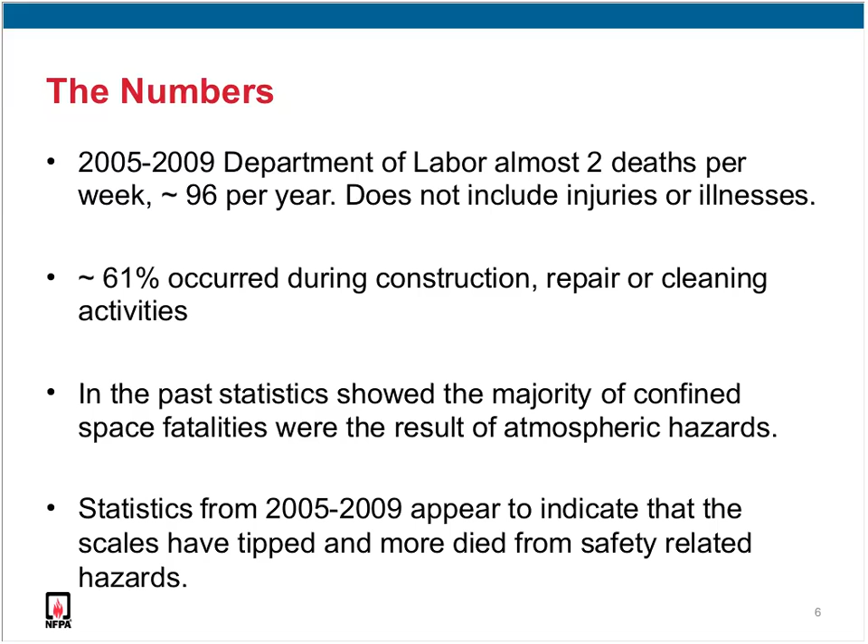One example of this is in 2010, 26 workers were killed in grain engulfments. According to researchers at Purdue University, there have been more than 900 cases of grain engulfment reported, with a fatality rate of 62% over the past 50 years. So this has been a hazard that has been well recognized for 50 years, and yet it continues to occur.

Confined space fatalities in the same types of spaces in the same industries occur over and over again. Some examples of the most common are things like agriculture, brewery, and wine tanks. Those are sort of predictable confined spaces.

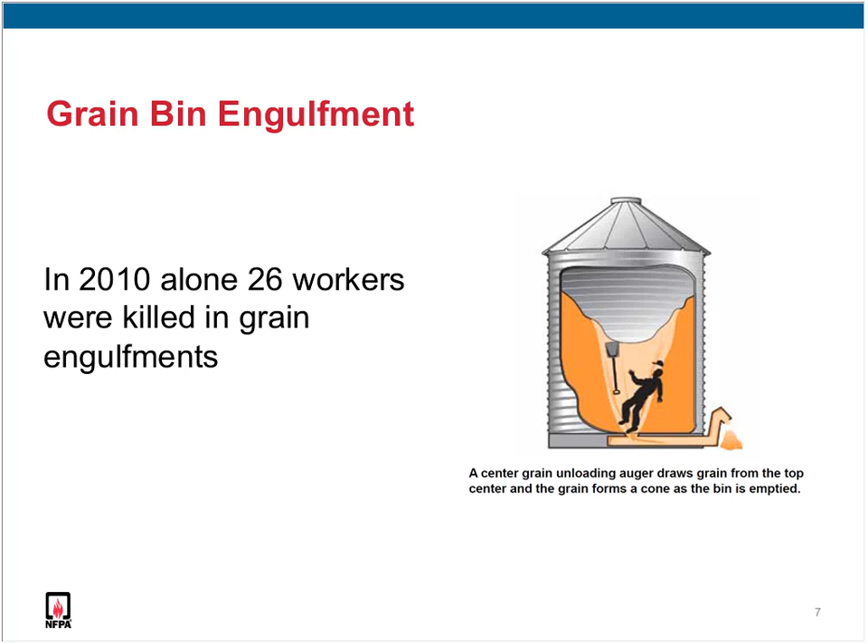So many may wonder how NFPA got into this confined space arena. NFPA has a long history of established standards related to confined space entry. One of the most widely recognized is NFPA 306, which since 1922 has been the Standard for Control of Gas Hazards on Vessels, and that is the origin of the Marine Chemist Program.

For those not familiar with what a marine chemist is, I think of it almost like a CIH who specializes in the maritime industry, particularly in confined space entry and hot work in that industry. Those are the folks who certify tanks, ships, and barges as safe for entry or hot work, and they have a very rigorous training program with testing for competency.

NFPA has been addressing that since 1922 and has had a lot of success in the maritime industry with preventing fatalities. We also have several other documents, like NFPA 326, which is safeguarding of tanks and containers for entry, cleaning, or repair. We also get into confined space rescue with standards such as NFPA 1670, operations and training for technical search and rescue incidents, and NFPA 1006, the rescue technician professional qualifications. So we've got many years of experience in confined space entry and in things like hot work and rescue.

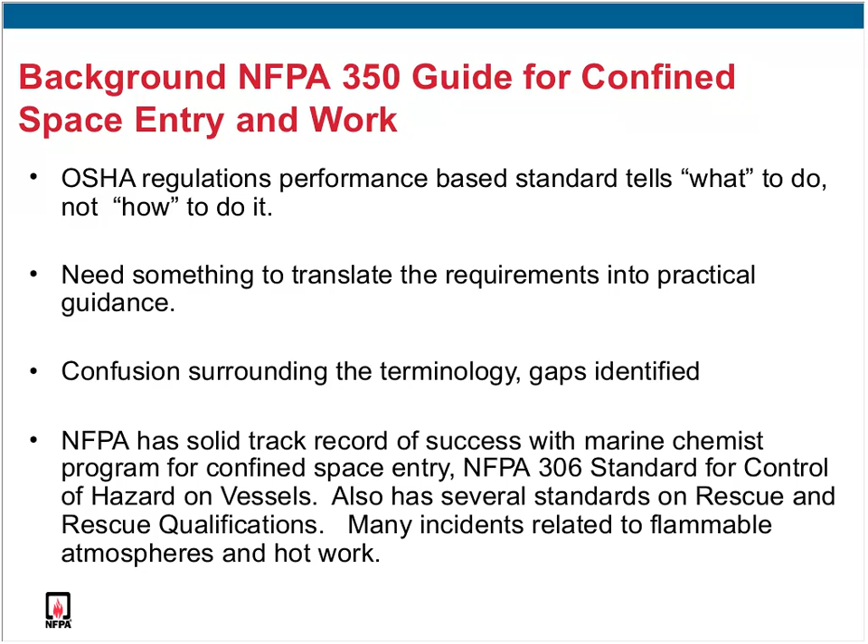Looking at the success of the Marine Chemist Program at preventing injuries and deaths, the Standards Council at NFPA approved the formation of a new committee with a new project to be developed on confined space entry.

We had our first meeting of the committee in September of 2012. NFPA committees are comprised of up to 30 individuals from a variety of interest groups such as manufacturers, special experts, enforcers, labor representatives, document users, and insurers. This group came together for the first time in Philadelphia to work on the preliminary draft of the document.

Some of you may have heard me talk about this before, but I get kind of sappy when I talk about confined space entry. It's a topic I'm very passionate about, so we met in Philadelphia because I said that's the birthplace of all important documents, and hopefully this will be one of those that has a real positive impact on worker safety and confined space entry.

So we met, and then we had two additional meetings after that September meeting, and we developed a draft document. That draft document was approved by the Standards Council, and it went out for public input, so at that point it was out there for the public to review and make comments on.

We did receive quite a few comments on that. We went back and looked at all of those, and the committee has to actually look at each individual comment that was received, and they make a change to the document if they feel there was something valid that was brought up, a concern.

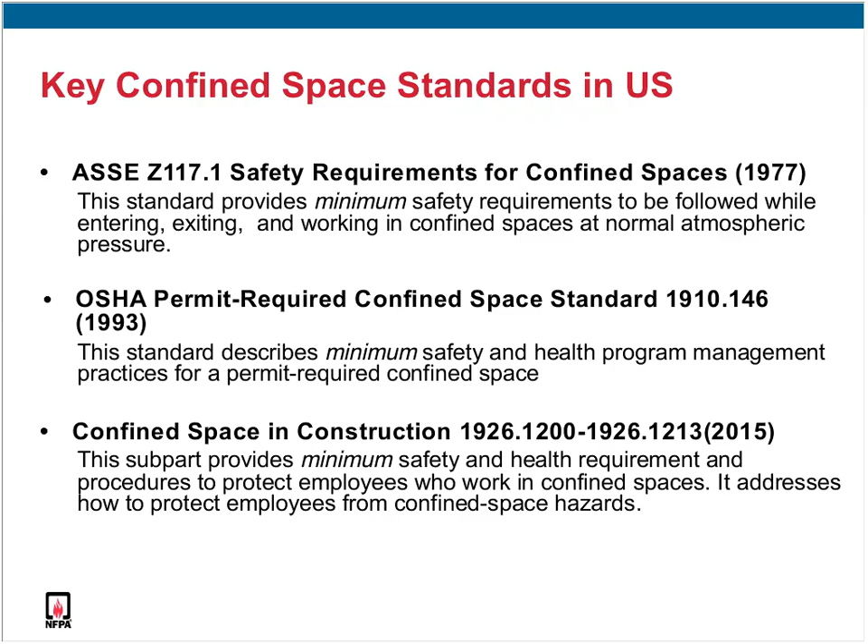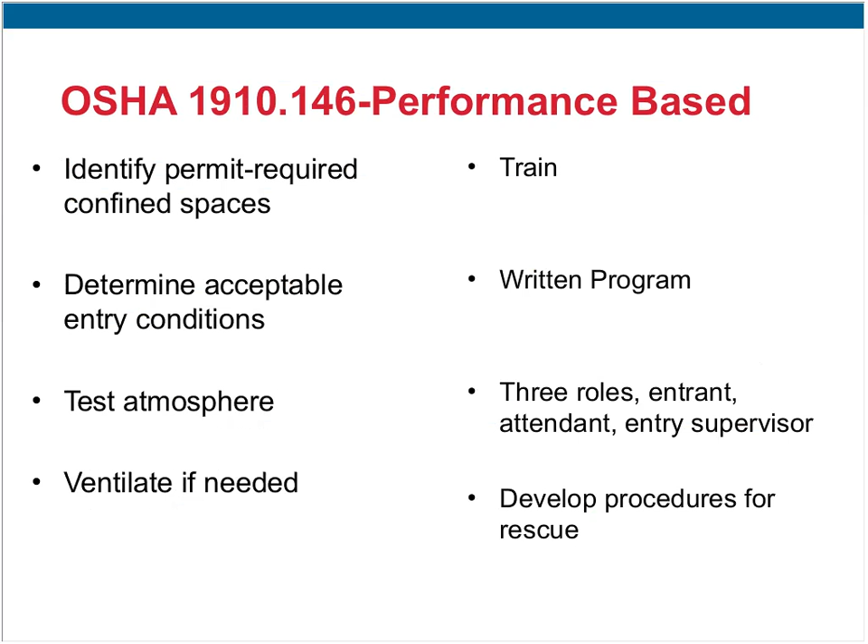As a basis for what the committee was looking at, we started off with the OSHA 1910.146 standard, which again is a performance-based standard. These are some of the items covered by the permit-required confined space standard, but again, it tells you what you need to do. For example, train your employees, develop written programs, identify your spaces, test your atmosphere, ventilate, etc., but it does not tell you how to do it.

So what are some of the problems we see with performance-based standards? Well, performance-based standards focus on a desired outcome. It tells you what to do and not how to do it. And while ultimately what we all want is just a safe confined space entry, it's sometimes difficult to know how to get there. I like to use this example of a performance standard that some of you out there who have had children will really appreciate.

If my goal was to have my kids clean up their room, and I simply told them to clean up their rooms, my son would probably pick up his toys and clothes and never vacuum or dust, whereas my daughter would likely vacuum and dust and leave her clothes and toys all over the floor. And neither one of them would probably make their beds. So while each of them may think they have done what was asked, the desired outcome of what I personally consider a clean room would not be achieved in either case.

What I probably would need to do is to tell them how to clean up their rooms by providing a more prescriptive requirement, saying that I wanted them to pick up their clothes, their toys, dust, vacuum, and make their beds in order to achieve the goal that I wanted. So there seems to be a little bit of a balance between allowing some freedom for interpreting what needs to be done and providing guidance on how to achieve the desired outcome.

So what is NFPA 350? Well, first of all, it's a guide. It is not a standard. It uses the words should versus shall. And the goal is to provide information to protect workers who enter confined spaces in all industries. So the goal that the committee had with this was that it would apply to all confined spaces regardless of industry. That means we would want this to apply to construction as well as general industry, as well as any other type of confined space entry that would occur.

So it's designed to supplement existing regulations, standards, and work practices by providing additional guidance. The goal is really to achieve a higher level of safety with best practices for identifying, evaluating, eliminating, controlling, or mitigating hazards. NFPA 350 also provides cross-references to related confined space documents where appropriate throughout the document. For example, a number of other ASSE and API, American Petroleum Institute standards are referenced throughout the document where appropriate.

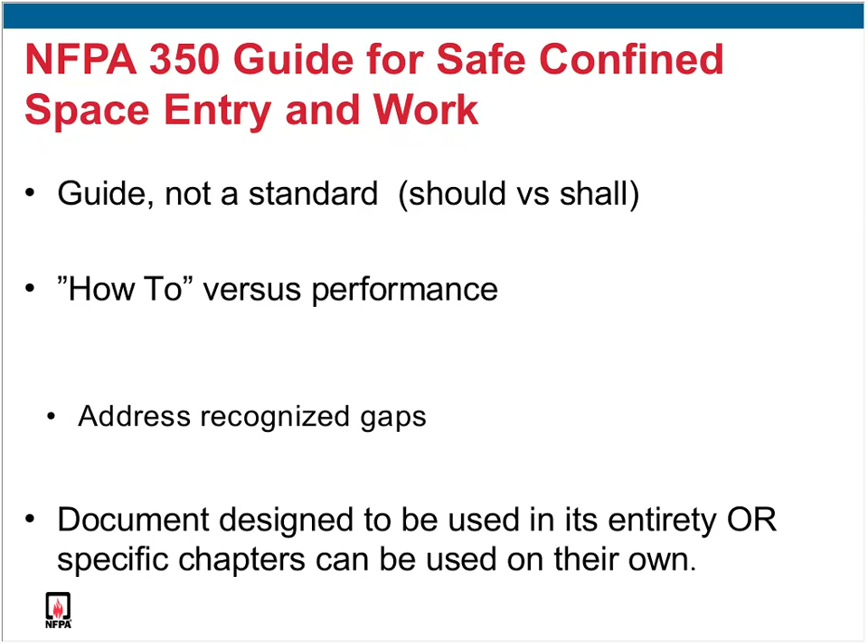So when the committee first met in September of 2012, they discussed the basic premise of the document they were about to develop. Some of the ground rules established early on included that whatever the committee came up with, they did not want to conflict with OSHA. That, of course, made sense. They wanted to be at least as strict as OSHA's permit-required confined space standard and in no way conflict with it, because this document is designed to supplement that information, not to replace the existing standard. The committee also wanted to eliminate confusion surrounding the terminology used in the confined space standards, address gaps, and provide guidance beyond the minimums.

So this is just a brief summary of the scope of the document that reiterates some of these goals that they had.

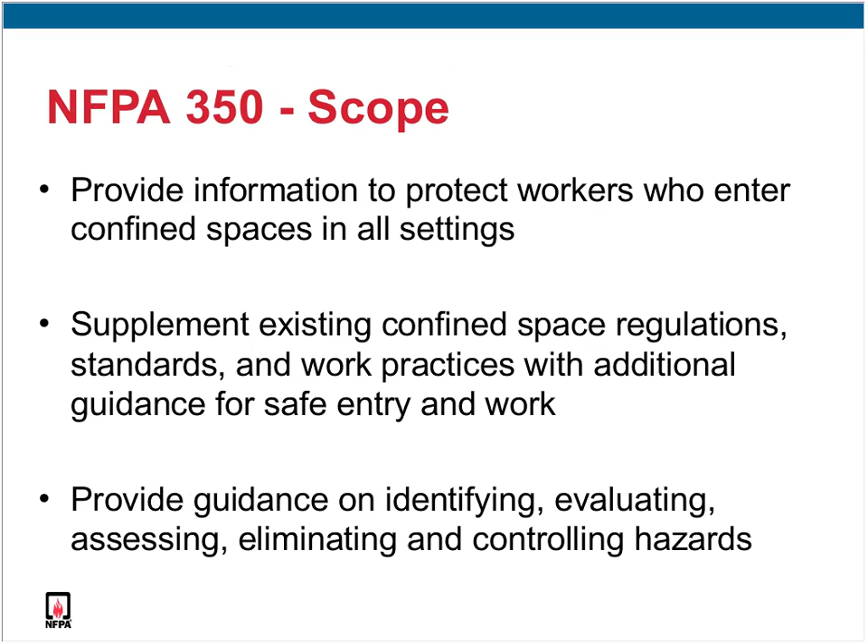First of all, the committee was very concerned, and this took a significant amount of time, with trying to address issues they saw as causing confusion. When the committee met for the first time, they had the benefit of a 20-year history on what worked and did not work with OSHA's permit-required confined space standard. The first thing they did was brainstorm to identify issues they felt should be addressed in the new guide.

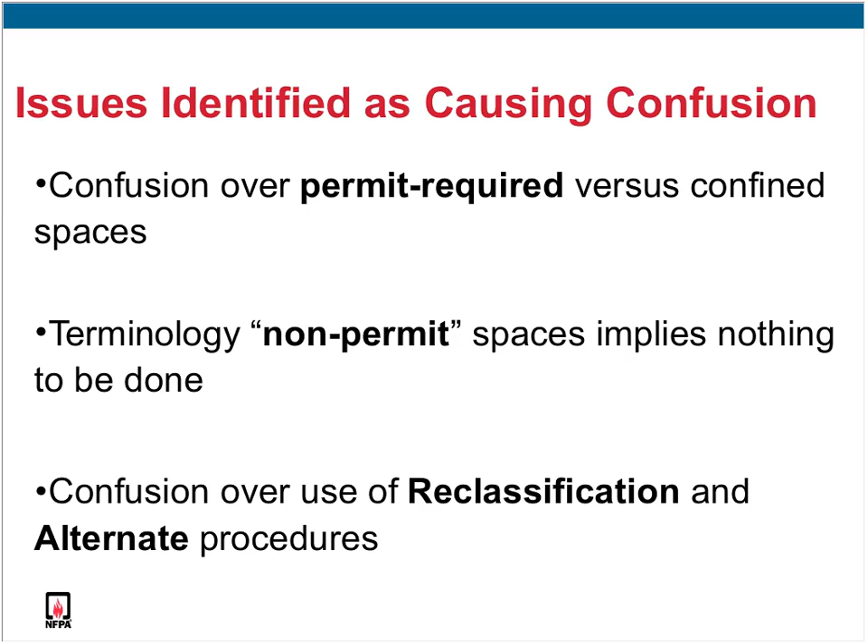The first issue they addressed was the confusion created by the terms confined space versus permit-required confined space. In addition, they looked at the confusion caused by different types of entries, reclassification versus alternate procedures, and how those could be different from permit-required confined space entries. They then looked at gaps that existed, primarily in the lack of consideration of things like adjacent hazards and how hazards were identified and controlled. They also looked at things like competencies and how that was handled, looking back at things like the Marine Chemist program, where competencies for things like gas monitoring provided some guidance.

So here is one of the biggest issues I think most would agree is confusing about OSHA's permit-required confined space standard. A space that's called a confined space one day becomes a permit-required confined space the next, as soon as you bring a chemical in or go to weld in a space. In addition, a space that could be entered using reclassification one day needs to all of a sudden be entered using alternate procedures the next day when an atmospheric hazard is introduced.

I don't know about you, but for me, when this standard first came out 20-plus years ago, that was really the thing I had the hardest time wrapping my head around, with some of the terminology. And then to make it even more difficult, trying to explain that difference in terminology to the regulated community and to those who needed to enter confined spaces was always a challenge.

So here's an example of that. As you know, a confined space is only a permit-required confined space when it has a hazard. In 1910.146, OSHA's standard only addresses permit-required confined spaces, so only those spaces that have a hazard. While that may sound reasonable, here's the problem. If you look at something like this water pump vault, is it a confined space not covered by OSHA's standard, or is it a permit-required confined space that is covered by OSHA's standard? The answer is, it depends. A space can be a confined space one time and a permit-required confined space the next. The same space is defined by different terms depending on what's being done in the space.

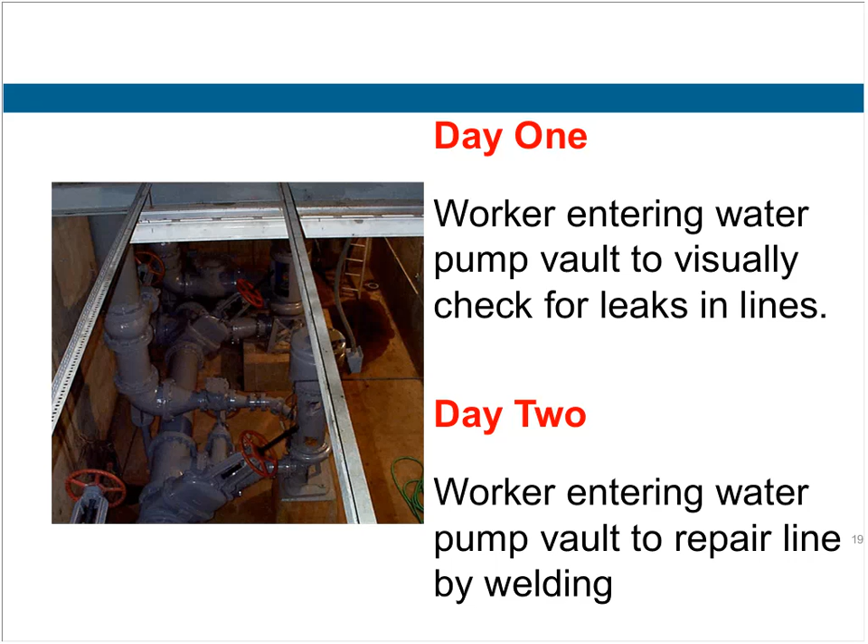So after many hours of deliberation, and I think we have our committee chair also listening in on this, and he's probably shaking his head right now. It was many hours of deliberation. The committee thought that they had come up with a method to solve the problem of confusion, and I think they've done a great job with this.

The problem is we've got to try to all now wrap our heads around this change in how we think about confined spaces. But I think this has really simplified the application of confined space standards.

So the committee decided to only use the term confined space in 350. And the rationale was that all confined spaces have the potential to become permit-required confined spaces depending on what is being done in the space. Therefore, it's important that all confined spaces be evaluated for hazards each time an employee enters one. Then, if a hazard is identified, control measures are determined and permits are issued if necessary.

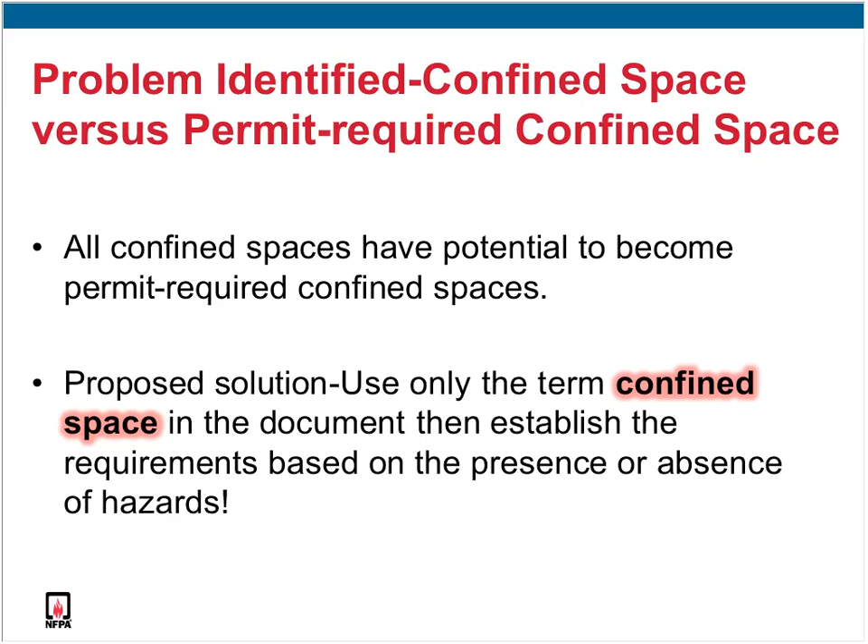So here's the difference: it's a confined space with a permit, not a permit-required confined space. And we'll see how this is applied in 350 in a few minutes.

So to further complicate the issue, if a space is identified as a permit-required confined space, then OSHA allows for 3 different types of entry depending on the type of hazards that remain after control measures are applied. Alternate procedures entry allows a worker to enter a space without an attendant when the only hazard is an atmospheric hazard that can be controlled by ventilation and where periodic monitoring of the space occurs. So there's our alternate procedures.

Reclassification also allows a worker to enter a space without an attendant when all safety and health hazards have been totally eliminated. However, if any atmospheric or serious safety hazards remain in the space, then a full permit is required.

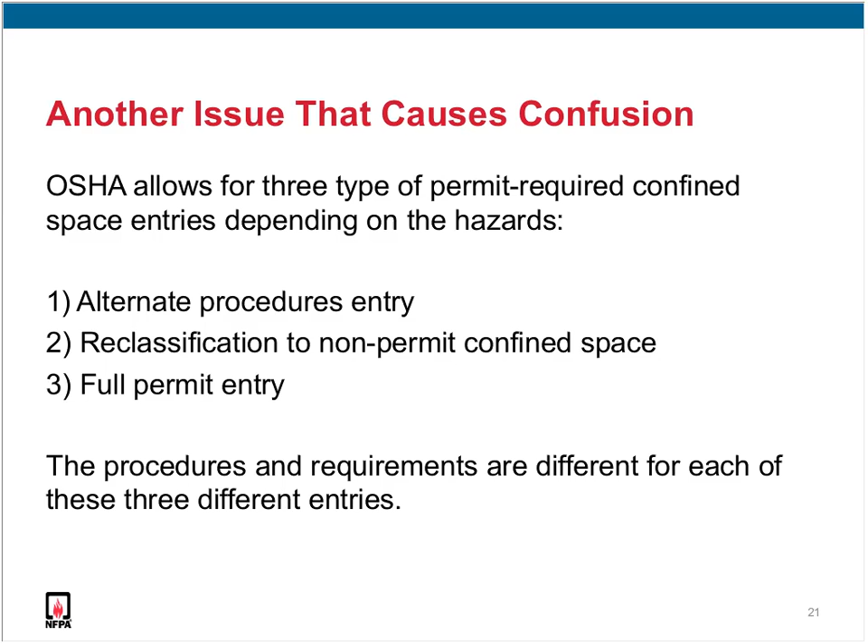And this next slide shows a chart of the 3 types of entries that are allowed under OSHA's permit-required confined space standard. All 3 types of entries require, if you notice in the right-hand column, some type of certification and signature. Many facilities actually use 3 different documents: an alternate procedures entry form, a reclassification entry form, and then a 3rd document for a permit.

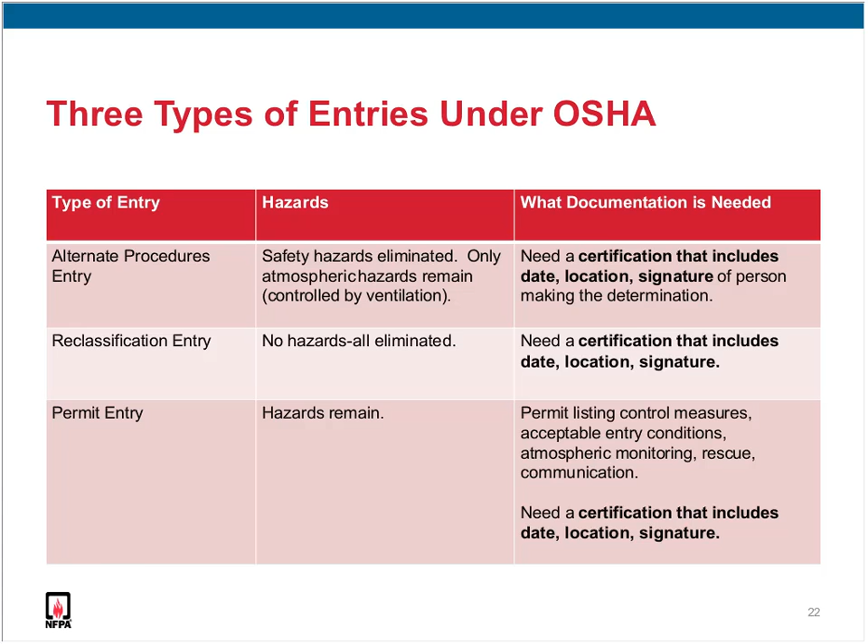But in all cases, in order to determine which of the 3 entries is needed, you first have to determine if there are hazards, and then you need to determine if the hazards are controlled. So in the case of alternate procedures and reclassification, OSHA actually allows you to do this without going through any type of formal checklist. All you need is a certification with a signature saying that determination has been made.

But since all 3 types of entries require an evaluation of a hazard, NFPA 350 recommends using a pre-entry evaluation for all of these confined space entries. So all spaces are evaluated using one form called the pre-entry evaluation form.

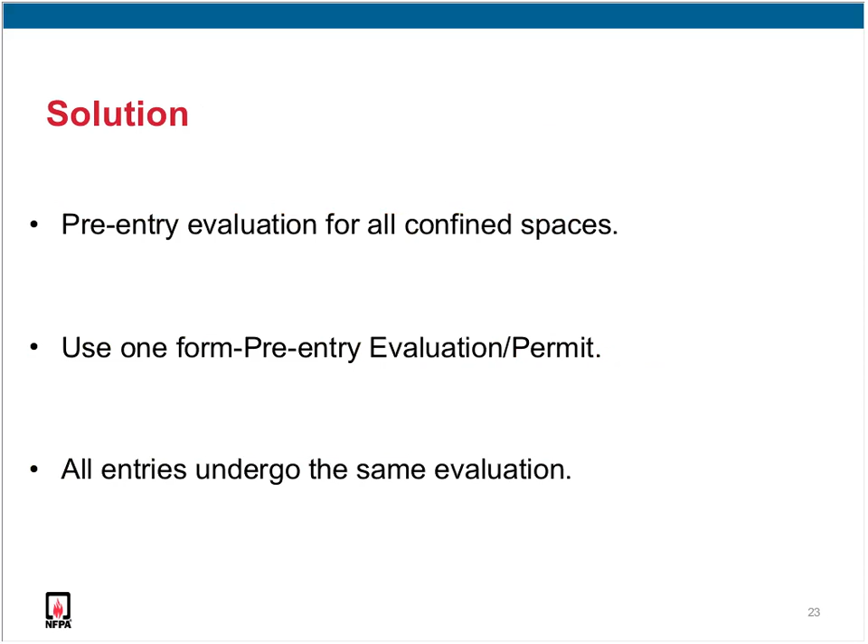So what is a pre-entry evaluation form? Well, it's simply a checklist that helps you walk through the possible inherent, introduced, and adjacent hazards in or adjacent to a confined space, so that you can determine what is needed to enter the space.

The requirement to evaluate these hazards already exists in 1910.146. It's just not always formally documented. So again, for alternate procedures and reclassification, you kind of have to do this all, but you could do it in your head versus going through a formal checklist.

What we found out was that there were many facilities with confined space entry programs who figured out that it just makes sense to use a similar checklist to document the hazards of all confined spaces and to help determine if alternate procedures or reclassification procedures can be used, or whether a permit is needed.

Now, there is one additional thing that NFPA 350 has established for this pre-entry evaluation that you will not see in OSHA's permit-required confined space standard, and that is the recommendation that an additional step be that atmospheric testing be done prior to entry into all confined spaces to verify that a space is safe to enter. And I'll show you how all that works in a minute.

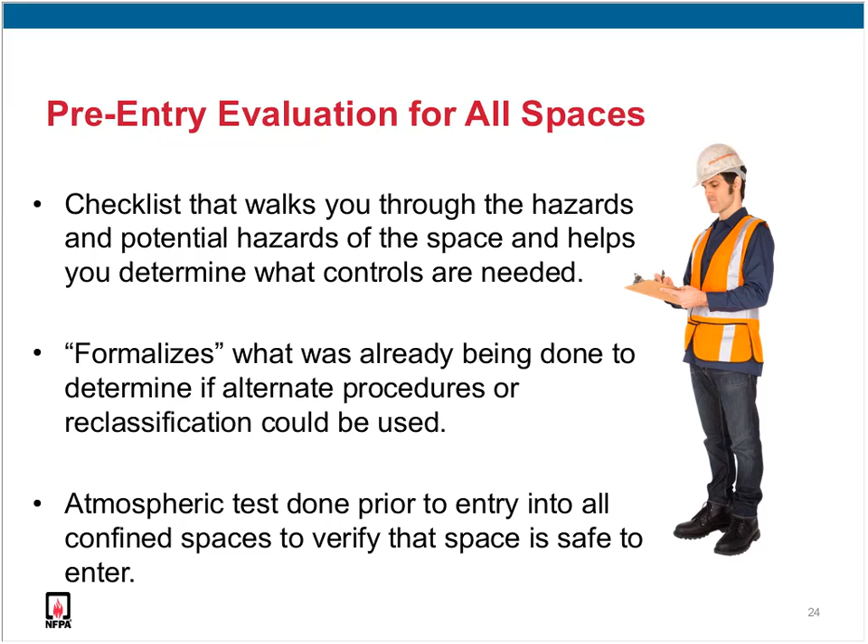So a key component of your pre-entry evaluation is going through to determine your hazards and your controls, and whether there are hazards that still exist in order to determine what types of procedures you need to enter.

We also recommend that you do atmospheric testing, and that's the default position, that you do an atmospheric test. That was a big source of discussion and debate amongst the committee members, but ultimately the committee agreed that...

So spaces that look pretty harmless, you really don't know until you test to verify. And I'm wondering, in that case with the transformer, that may have been something very similar where the atmosphere may have been the cause there, and perhaps that is not something that is normally done.

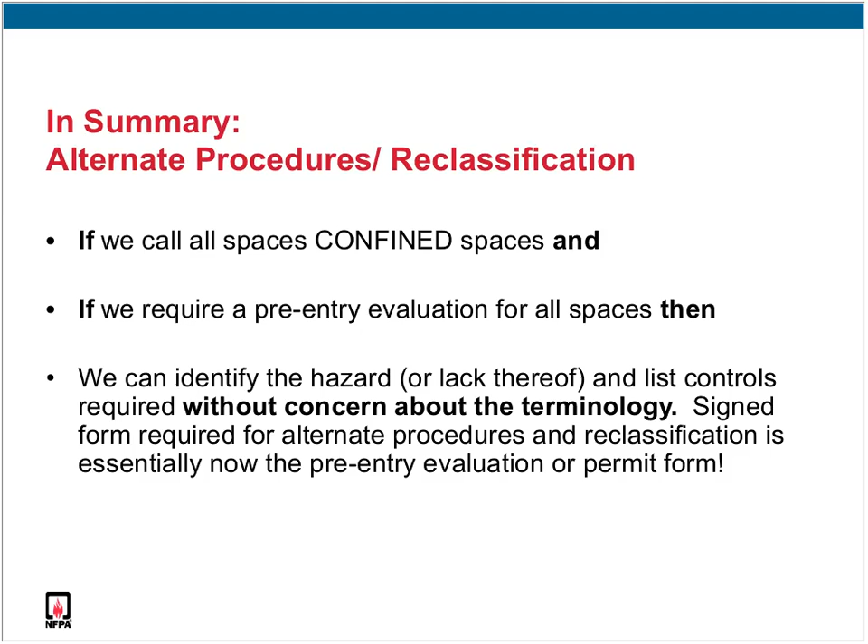This is maybe a little bit small and hard to read, but I'll try to walk you through it. We go through the normal questions we would normally have, where we determine that it's a confined space in these first three questions. Then, if it is a confined space at all and your question is answered yes, you have to go to a pre-entry evaluation under NFPA 350.

From that pre-entry evaluation, you're going to look first at a lot of the safety hazards to make a determination of whether or not those exist. Then, following over to the left-hand side, you would then perform atmospheric monitoring even if there are no safety hazards. So if your answer is no, you still go into performing atmospheric monitoring.

Then you look to see whether or not the levels are outside of established parameters. If they are not, then you end up with a reclassification - way over on the left. So now you have a reclassification space. We don't use that term in NFPA 350, but this kind of walks you through where you would be in the equivalent for the OSHA permit-required confined space standard. So you go through, do your pre-entry evaluation, find that there are no hazards whatsoever, verify that there is no hazardous atmosphere, and you end up with a reclassification space.

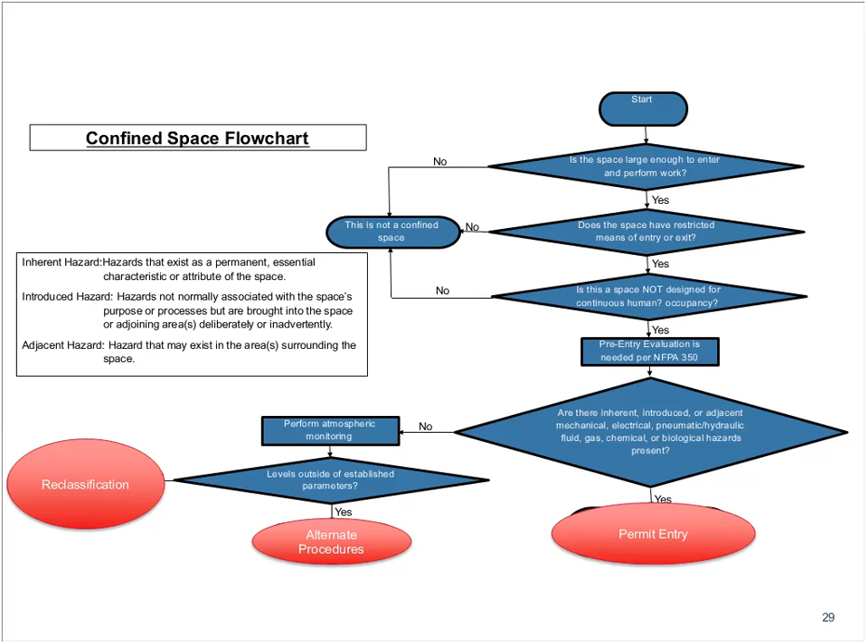So that hopefully clears up some of the confusion. I will tell you that it'll probably take you a little while to keep reading that to understand how that works, because for those of us who have worked in that other terminology for many years, it does start to get a little confusing. Hopefully once you read this a few times, you'll see that it really has simplified things, that we're just calling everything a confined space.

So what about additional things that are covered by 350? Well, there were additional gaps. One of them had to do with atmospheric monitoring. NFPA 350 provides a lot of information on selection of the proper gas monitor, how to calibrate, how to do bump testing, etc.

You'll notice there's a difference highlighted here in the acceptable levels of entry for oxygen, and that's consistent with what we have in NFPA 306 for marine vessels and shipyards. It's providing an additional level of protection, because there really is nothing in nature that should increase your oxygen levels. So as soon as you get up to 22%, you should really stop and look to see what is going on. We also talk about having a qualified gas tester, the person who is going to be doing the monitoring, and we'll talk a little more about competencies later.

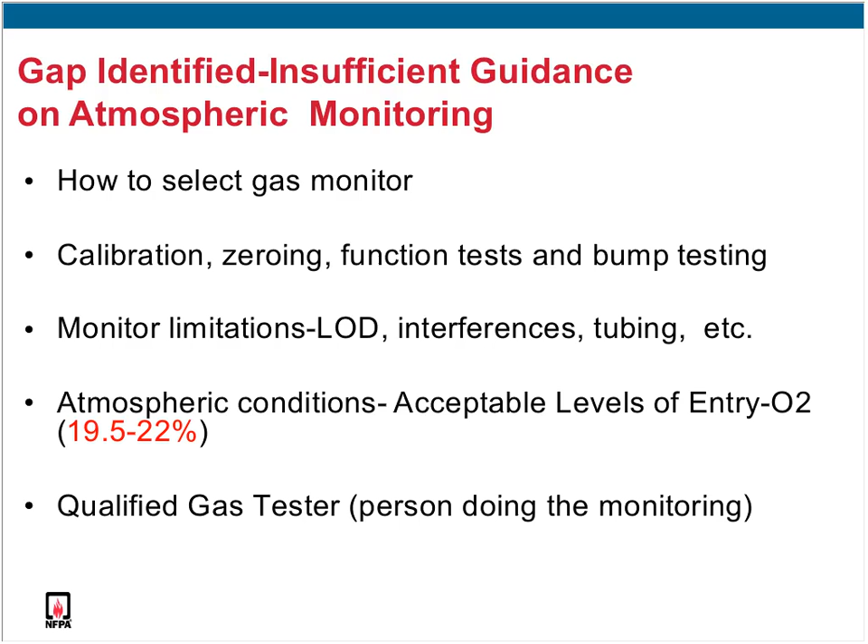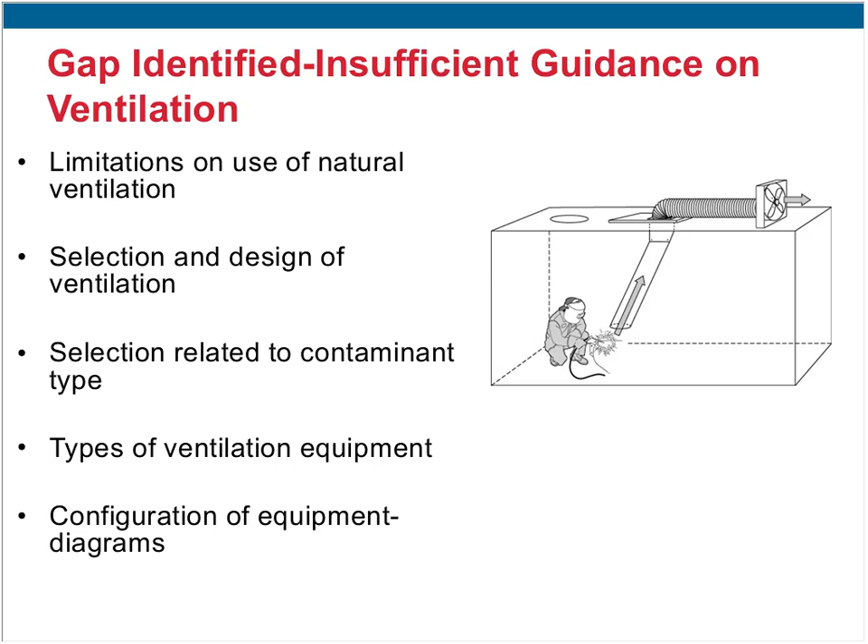Another gap that was identified was guidance on ventilation. Unfortunately, there's not a lot of hard science on ventilation of confined spaces, and there can be many ways to ventilate a confined space, but NFPA 350 starts to talk about how to select the right type of ventilation for a space, looking at things like the configuration and the hazard you're trying to control, whether you're trying to provide an increase in oxygen, remove flammable vapors, or remove contaminants. So we have some different diagrams in the document and some guidance on ventilation.

Some of the things covered in the document include the fact that ventilation is dependent on the type of atmosphere you're controlling. If you have low-level contaminants, or a low oxygen atmosphere, supply ventilation can be effective. However, there are definitely times when you would not want supply ventilation, such as when you could bring a level of flammables into the explosive range.

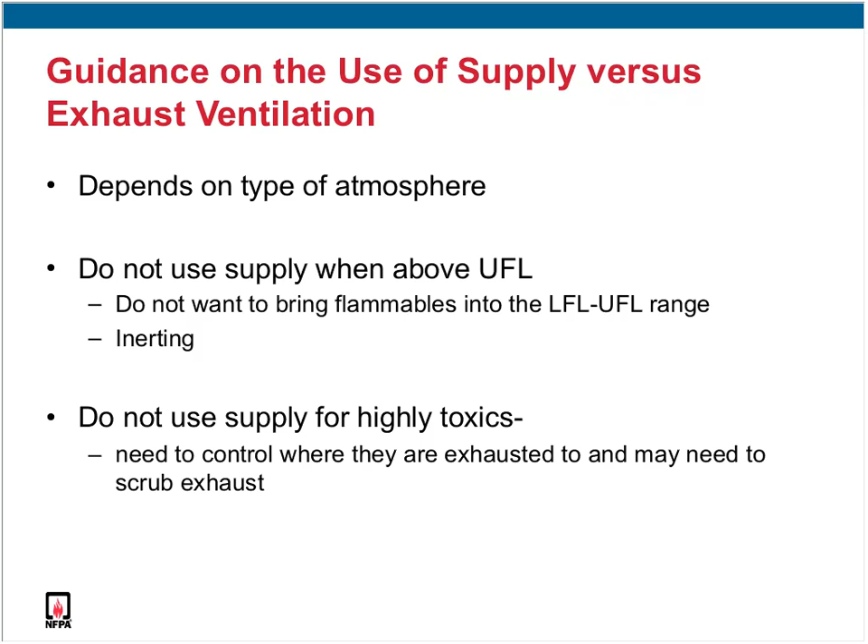The other time you would really be concerned with supplying ventilation is if you had highly toxic contaminants, because if you supplied air to the space, the air being displaced out could affect the attendant outside the space, could affect other people in the area, or could have an environmental impact. Those are the kinds of situations where you would probably want to consider exhaust and scrubbing that exhaust. So we talk about some of those considerations.

Another gap identified, both by the Chemical Safety Board and by the committee, is adjacent spaces - spaces next to the confined space, probably where people like the attendant are. That was addressed in this document. NFPA 350 provides clear guidance about 3 categories of hazard: inherent, which is something already existing in the space; introduced, things you're bringing into the space, such as a chemical for cleaning or something for welding; and adjacent hazards, which are outside the space but may impact it.

The pre-entry evaluation form actually identifies those 3 distinct types of hazards, and that just helps remind you that you're not just looking into a space and saying there's nothing there, or I've tested the atmosphere and there's no problem. It makes you think about the fact that you may be introducing things into that space, or that there may be hazards adjacent to the space that you need to consider prior to entry.

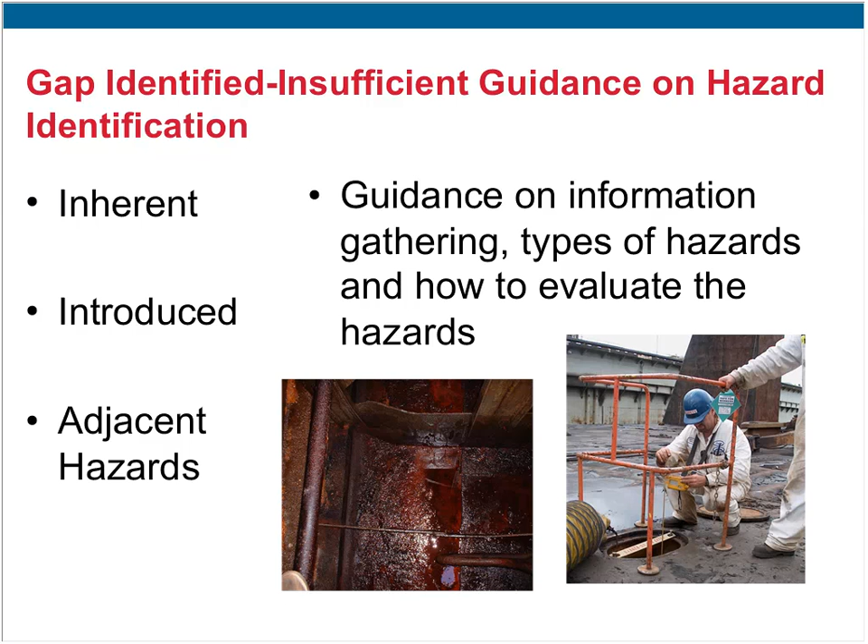Here's a couple of quick examples of adjacent space issues. There was a fatality with a person cleaning near the opening of a methylene chloride tank - they believe he fell into the tank first, probably being overcome by the methylene chloride. Most of you are probably familiar with the Valero case, where there was a nitrogen asphyxiation, and again they believe the person was outside the tank and was overcome by that material, by the nitrogen.

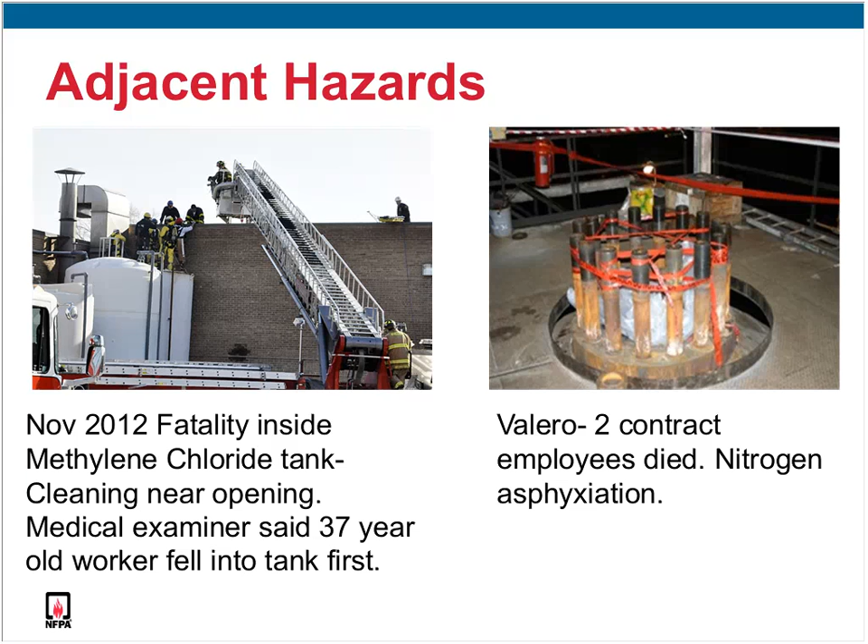There's certainly been a lot of confined space incidents noted by the Chemical Safety Board, where flammable atmospheres outside but adjacent to confined spaces led to explosions and impacted the confined space. One of the things NFPA 350 has done is recommend that all inerted atmospheres be posted with the following notice, which should eliminate any possibility of miscommunication.

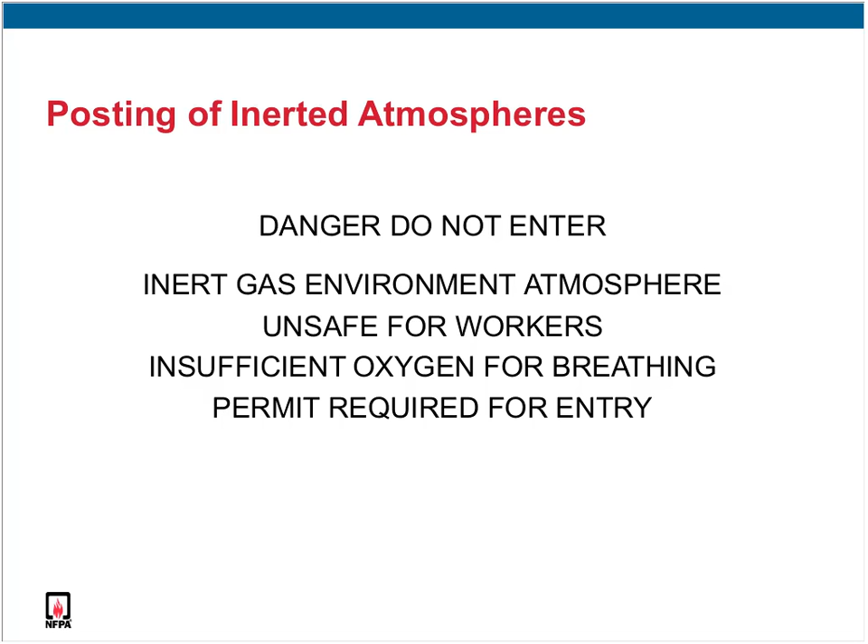The industrial hygienists out there will appreciate that NFPA 350 talks about the hierarchy of controls for addressing hazards, looking at the most effective methods of controlling hazards. There's a lot of information in the document on how to control hazards, including those introduced into the space.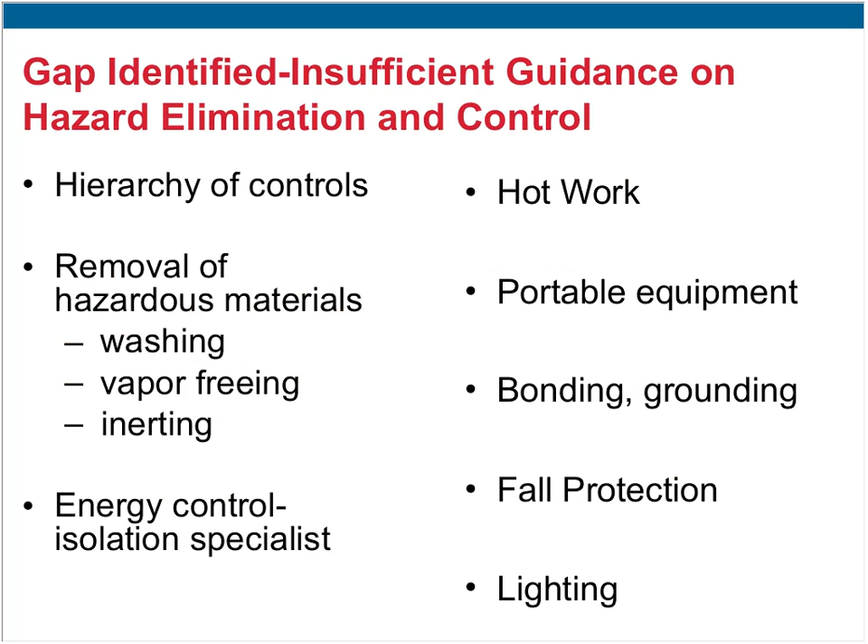Another big gap identified was on rescue. Generally there are organizational elements in place for fire departments, but not necessarily for facility rescue programs. We had fabulous rescue experts on this committee who made great recommendations. This document works with NFPA 1670 for the technical aspects of rescue, and also references job performance requirements covered in NFPA 1006, the Technical Rescue Professional Qualifications document. They talk about retrieval configurations and gear, with a focus on pre-incident planning and evaluation.

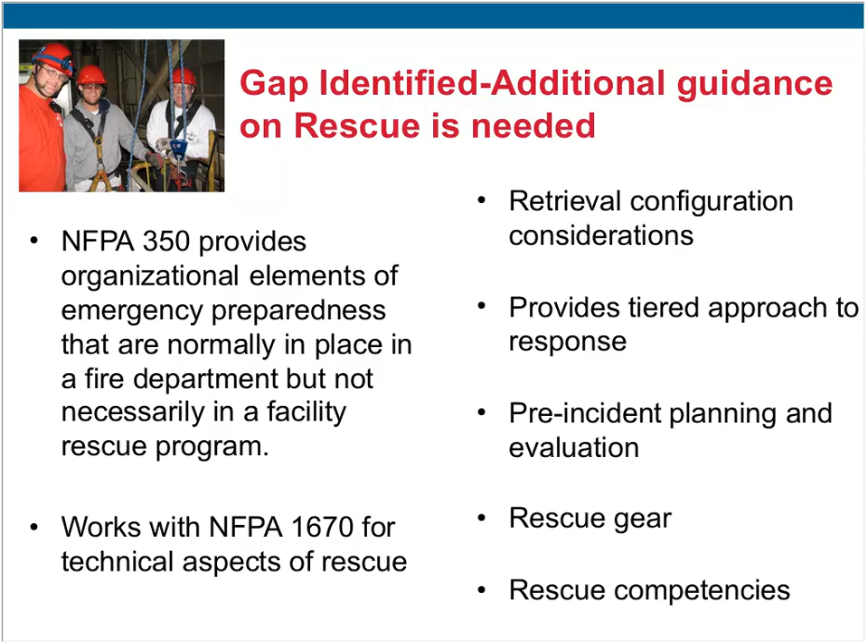Non-entry rescue is emphasized and is consistent with 1910-146. However, when rescue teams are required, NFPA 350 provides a tiered approach to response, dependent on the hazards that remain after controls are applied. In some cases the recommendation is to have a rescue team immediately on site; in others they need to be available; and in others they do not need to be on site at the time of entry. So there are three tiers.

NFPA 350 recognized that demonstrated competencies are critical for workers involved in confined space entry and work. In addition to the entrant, attendant, and entry supervisor roles defined by OSHA, NFPA 350 provides recommended competencies for those who perform tasks such as atmospheric monitoring, ventilation, and rescue. This doesn't mean NFPA 350 recommends assigning all these additional workers to perform those tasks—just that the person responsible should be competent and qualified to do so. For example, the gas tester defined in the document should be qualified beyond simply turning on the monitor and recording results.

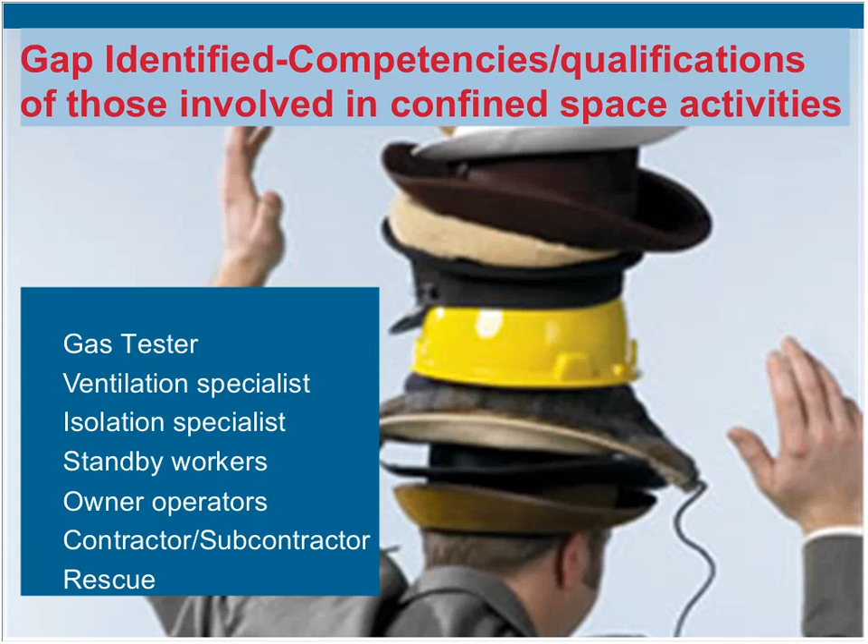We also have a management of change form and a chapter on management of change. The committee recognized that changes in space configuration, equipment, materials, contents, or work tasks can significantly impact confined space entry. So we provide a sample form in the Annex that helps identify and evaluate the potential effects that change may have on confined space entry.

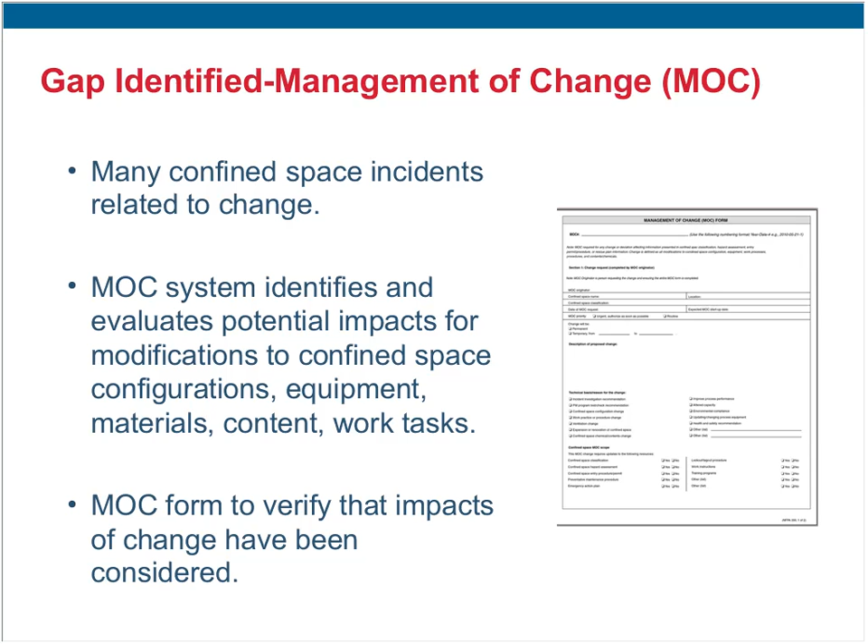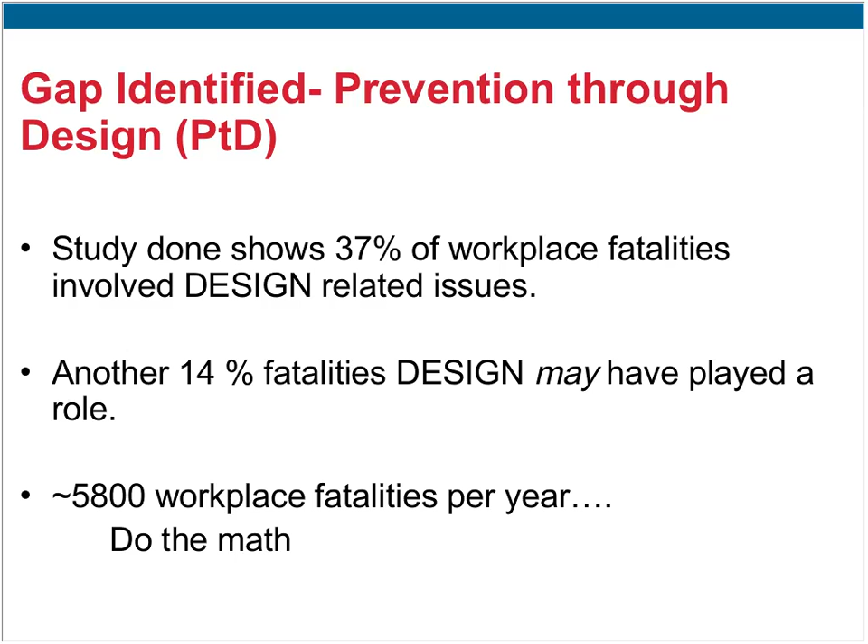Prevention through design is really the pinnacle of the hierarchy of controls. It's been found to be the most effective and most cost-effective safety control, since it eliminates the need for hazard controls by eliminating hazards at the design stage. The committee looked at how this could be applied to confined space entry, so there's a chapter on prevention through design with lots of ways to eliminate or minimize hazards. For example, if you don't want an employee sticking his head into a space, as shown in the bottom right-hand slide, make the hole the right size so that nobody can stick their head in.

There's ways to design and redesign—things like putting in anchorage points, standard staircases, and adding ventilation to a space. All of these can be done in the design phase to eliminate confined space hazards. In the middle, I've shown that San Francisco Public Utilities Commission has a whole book similar to ACGIH's Ventilation Design Manual, with templates for good confined space design. Since this is really the first document to specifically address confined space prevention through design, we expect to add reference documents to this chapter. For example, there's a grain silo standard proposed to require anchorage points, which we'd want to reference. And I understand there's another document in the works for manure pit design that incorporates safer design.

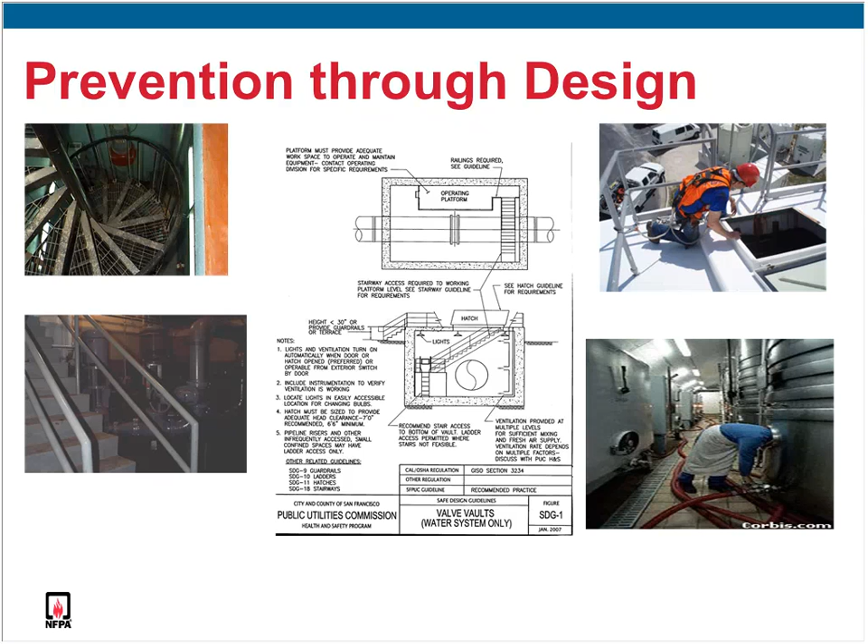So we want to become a repository for those pieces of information. The OSHA confined space standard for construction is something that we will be looking at.

As I mentioned earlier, it was the last day of our meeting for the second draft, the last date that OSHA actually released this construction confined space standard. So a complete review of that document was not done by the committee. However, I have looked at it, and most of the concepts appear to align very well with NFPA 350.

The construction standard uses the term entry employer, and we use the term entrant employer. They're very similar. The confined space document has a competent person evaluating the spaces, which of course aligns very well with what we're recommending.

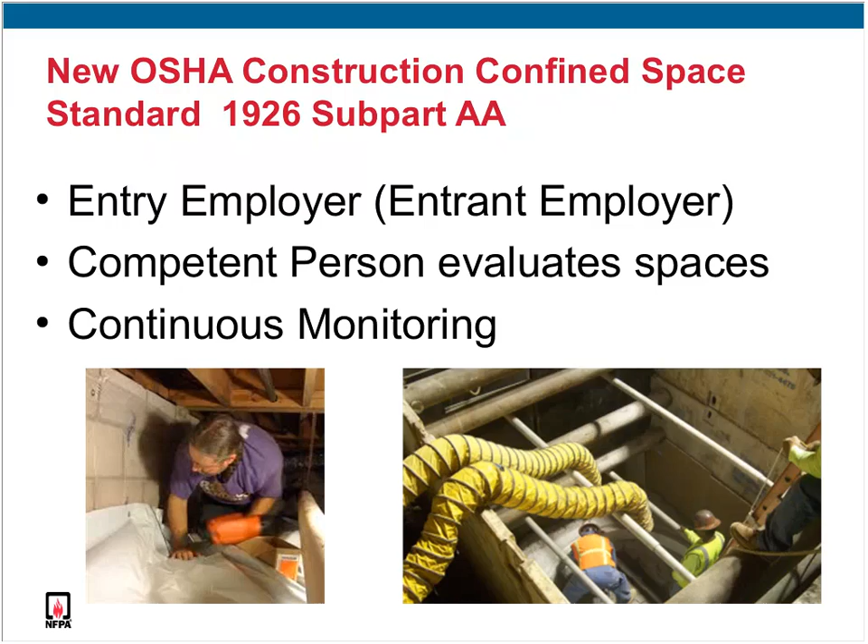They also recommend continuous monitoring of confined spaces versus periodic monitoring that's required for the general industry standards. So the first cut, it certainly looks like that's going to align very well, but we will take a look at that again.

So just to wrap up, I want you to know a little bit about the Codes and Standards development process. NFPA 350, the 2016 edition, is now available. It was just released last month.

Because we go through an ANSI consensus standards process, we will be revising our document every 3 to 5 years, and probably will start out every 3 years with a new document, to make sure we keep looking at this document regularly to improve it and stay consistent.

So the next document will be released probably about 3 years from now with a 2019 date, and we probably will have at least 3 in-person meetings between now and then. All those committee meetings are open to the public.

By about March of next year, you will actually be able to go onto our website. You'll be able to click on whatever section you want to propose a change to or add a new section, and you can submit that recommendation with a good solid substantiation or reason for that change. Then the committee will consider everything it has received.

That document again will then be revised. That will be our first draft. And that will go out for a second round of review, and you can come back and submit comments to those changes.